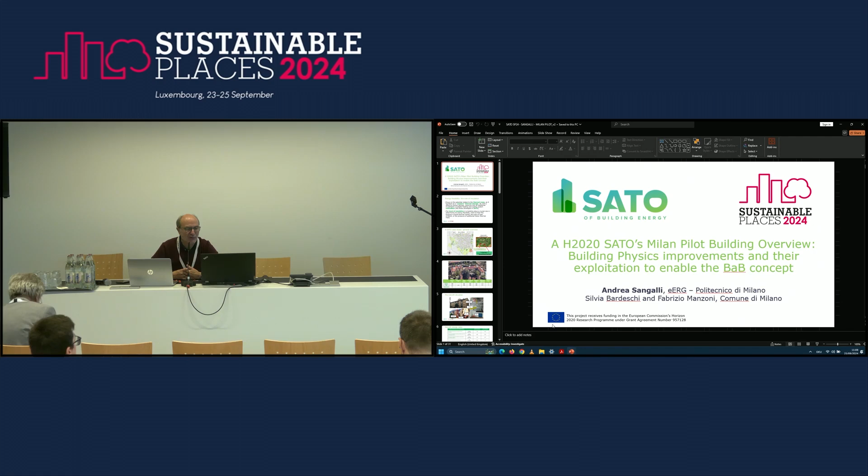Andrea, would you stand or sit? Okay, this is the clicker. I guess it works. Okay. Yes.

Thank you, Federico. I'm Andrea Sangalli, building engineer and senior laboratory technician at Politecnico di Milano. And I will present the results of a collaboration of more than 10 years with the Comune di Milano, the city of Milan, in particular with the technicians, the architects Silvia Bardeschi and Fabrizio Manzoni, by which we are making it possible to enable the concept of building as battery that has already been introduced in the speeches before.

So the main point that we would like to highlight in this session is that building as battery is a concept that can be enabled and exploited with sensors, with algorithms, like we are doing in the SATO project, but there is a precondition, a necessary condition, in order to make this potential available. That is the quality of the thermal envelope of the building. Because you can have all the sensors, all the algorithms, but if you don't have the potential given by the good physics of the building, you don't have much to optimize. So that's why we wanted to focus a particular part of this session on this topic.

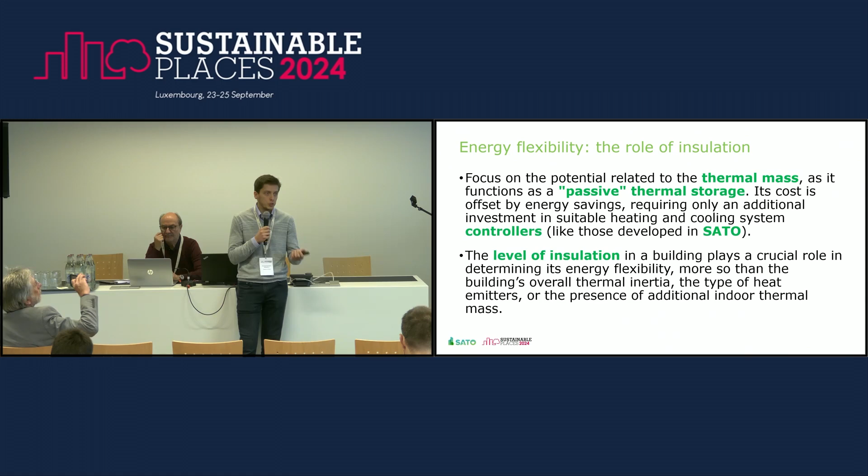So we don't require much additional investment, as is, on the other hand, required for other kinds of energy flexibility with different kinds of energy storage, like, for example, the classical electrical storage. So it's just necessary to make an additional investment in monitoring and control systems and algorithms that is for sure quite lower than an additional investment in other kinds of facilities in the building.

That's why we wanted to show a particular case study. So it's not something particularly innovative from the point of view of the scientific literature. It's something that is already well known, but with a novelty in terms of implementation, especially in the context of the public administration, like, for example, Comune di Milano. This was actually the first public residential building that was done with the NZEB, or nearly zero energy concept, for the municipality of Milan.

As a location, we are in the outskirts of the southeast of Milan. It's still Milan, but it's a kind of village, a historical neighborhood, in which several European projects have been implemented since 2013 to improve this neighborhood toward the smart city, smart neighborhood concept, and the nearly zero energy building concept.

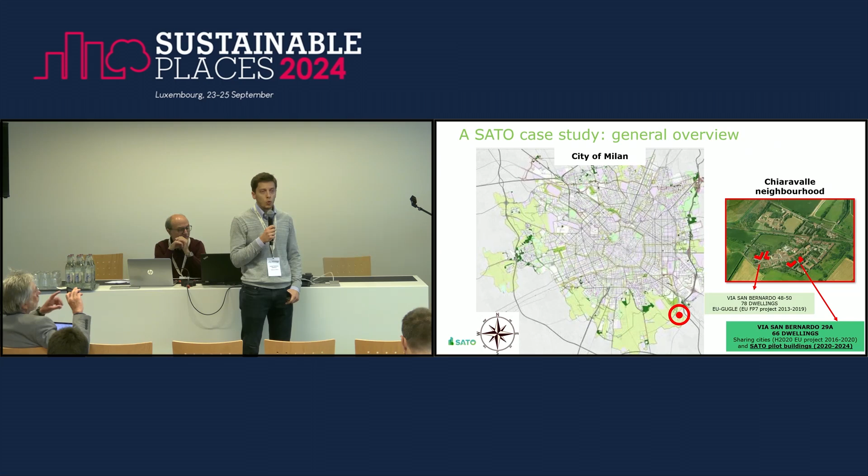We started with San Bernardo 48-50 with the EU-GUGLE FP7 project from 2013 to 2019. And then San Bernardo 29A, the one that I will address in this speech, started with the refurbishment works in the Sharing Cities project, and then we continued with the SATO project exactly to optimize the good work that had been done previously in terms of thermal envelope and building physics, adding high-quality algorithms and controls developed inside the SATO project.

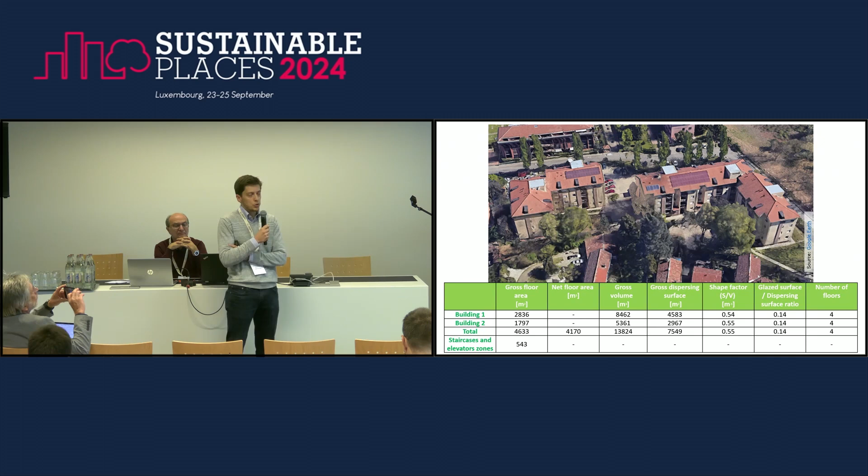Just to go quickly, this is the overview of the complex. It's 2 buildings of 4 floors and around 4,000 square meters of net floor area in total. And as I said, it's a public residential building, so with reduced rent for low-income families.

Just to have an overview of the existing, pre-retrofit situation, these are buildings from the 80s of the previous century, built with a technique particular for that area, of prefabricated concrete elements in the facade, in which there was basically no insulation. So there was a good thermal mass, but almost no insulation at all.

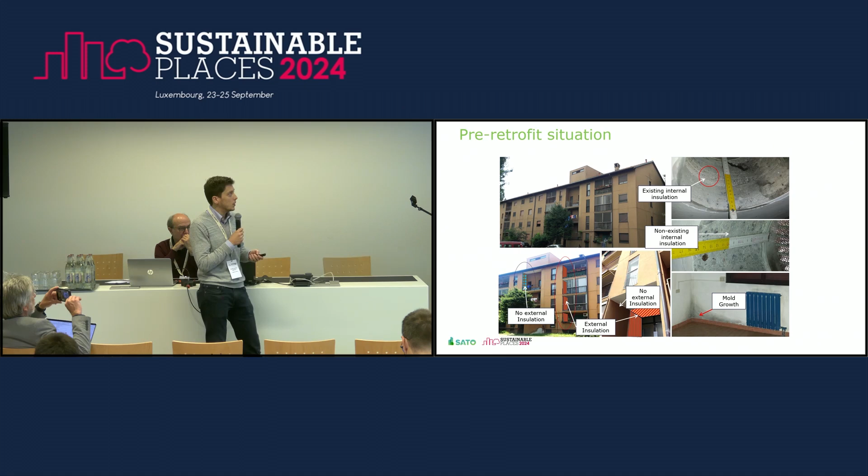Another important aspect that has been introduced is mechanical ventilation with heat recovery, that together with the quality of the envelope leads to a very good reduction in terms of energy needs. So this concept, energy need, has a specific technical meaning also in the international and European standards, and it's exactly the thermal energy that is physically necessary to provide to a conditioned space to keep a certain temperature, typically 20 degrees in winter and 26 in summer.

So this value doesn't have anything to do with the mechanical systems. It doesn't have anything to do with the efficiency of the mechanical system. No, it's exactly the energy that must be provided by the mechanical systems. Then the energy that we have to give to the mechanical system would be a bit higher, depending on the efficiency of the mechanical system, heating and cooling systems.

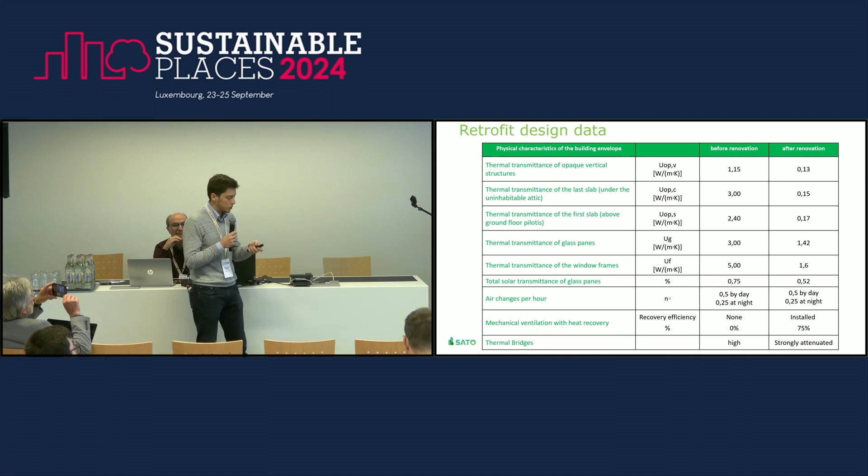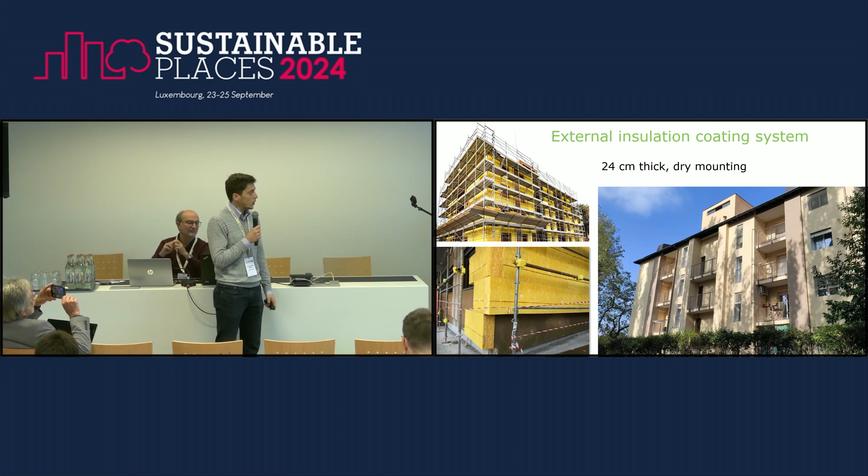To go further in detail about the thermal envelope, as already mentioned by Professor Pagliano, we added these 24 centimeters, 24, 25, depending on the facades, of external coating insulation to really make it possible to exploit at a later stage this very good thermal mass that remains on the warm side of the envelope.

As you can see, there have been different kinds of thermal insulation materials depending on the different surfaces. Basically, depending on the thickness that was available. Typically, on the balcony, there is the problem of limited space, so we have to introduce materials with a lower thermal conductivity to get the same performance with less thickness of the material.

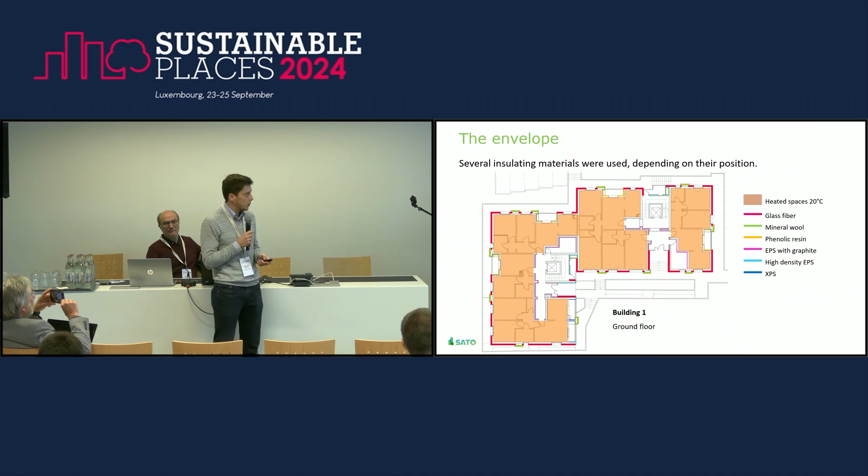So again, in collaboration between the architects that were the leaders of the project and us as a support for the scientific and thermal analysis, we had also this study of different materials that could be installed in the different parts of the walls, using also aerogel and phenolic resin, depending on the situation.

And the project has been completed with mosquito nets, because it's an area where this is a relevant issue, to allow for natural ventilation. So another further decrease of energy need for cooling during the summer season, as it is provided by the most advanced thermal standards in the topic of comfort, like ASHRAE 55 2020, ASHRAE 55 2023.

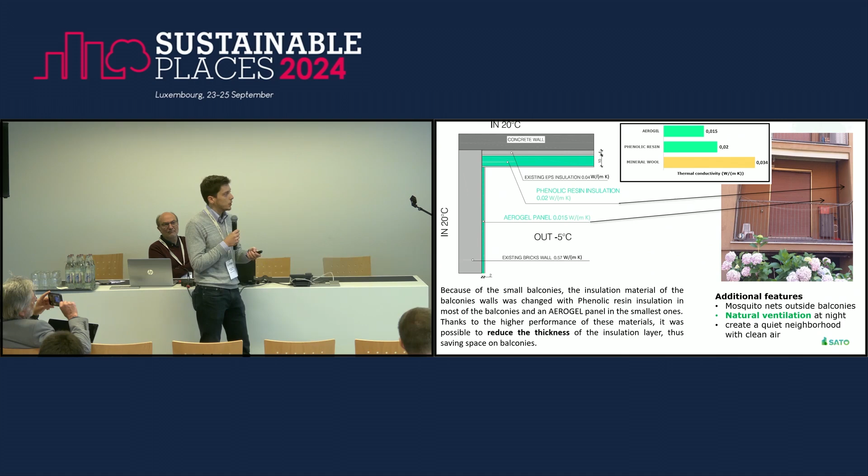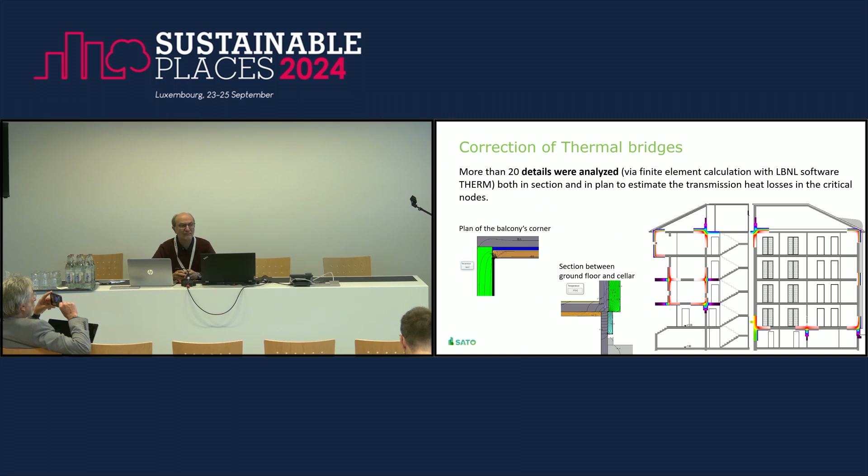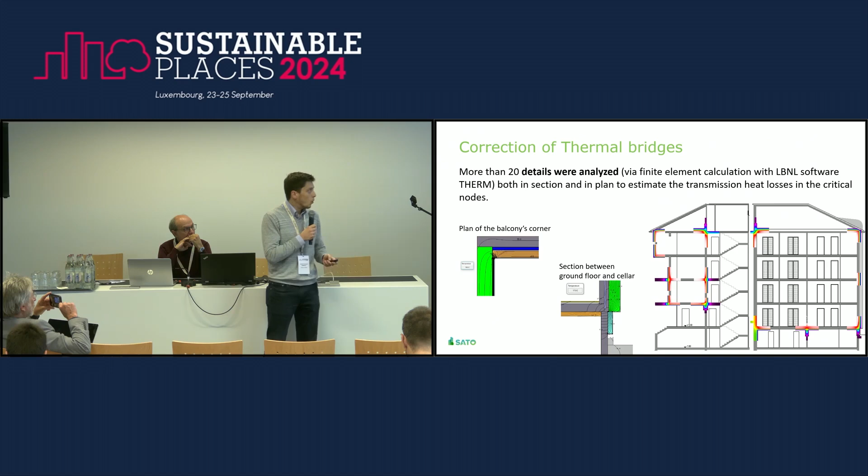Regarding thermal bridges, particular work has been done to identify all of them with a finite element analysis in order to reduce as much as possible each of the thermal bridges. For example, here this ground floor that is not heated is on columns. An additional part of insulation has been added to reduce the thermal bridge from the ground level to the first level of the building. Just to make an example, then all the details have been studied and solved as much as possible, one by one.

So this was regarding the opaque envelope. Continuing on the other side, that is the transparent envelope. There were these very low quality existing windows with a U value of around 4 that we brought to 1.25, and especially with the particular work about air tightness.

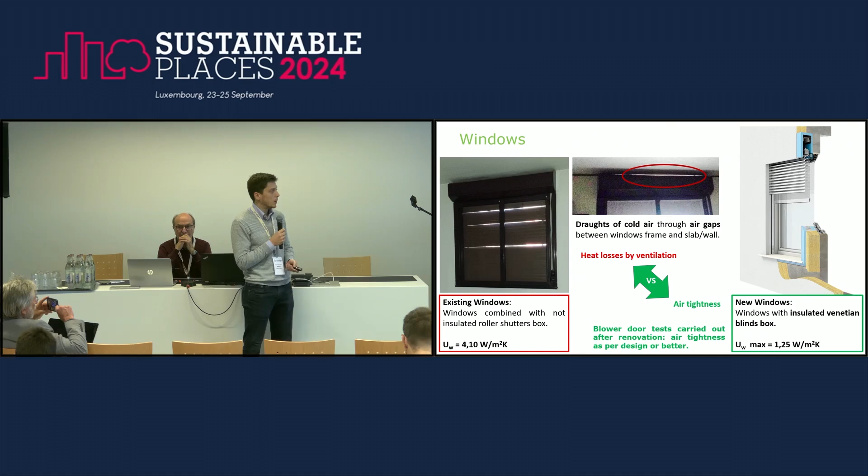That is very important to reduce not only the heat losses by transmission, but also the heat losses by ventilation. And this has been proved at a later stage, as was foreseen by the project, with the blower door test to guarantee that the expected air tightness of the envelope was reached, and it was demonstrated that this was the case.

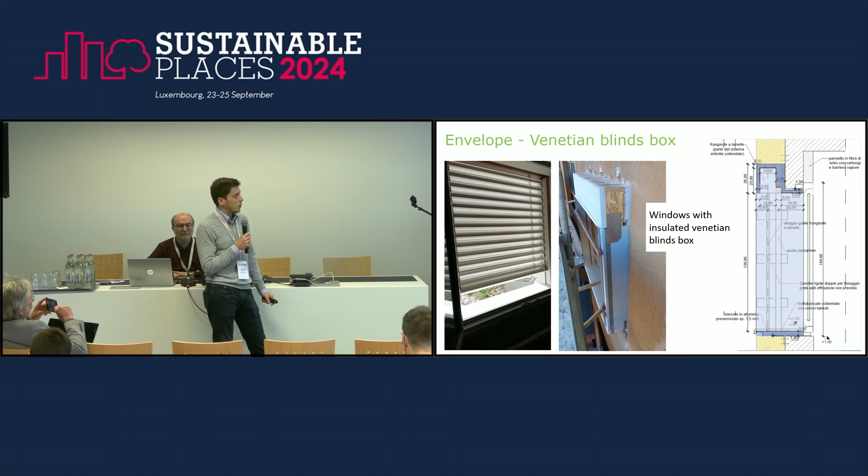Again, to reduce as much as possible the thermal bridges, and also for improving the ease of installation, this box with windows with insulated Venetian blinds was studied. So it was just a complete box, including also the solar protections, to reduce the thermal bridges between the wall and the window part.

And finally, in terms of mechanical ventilation, there was this mechanical ventilation with heat recovery and also bypass for the summer season that was included on the existing, because before there was not any mechanical ventilation, there was just the extraction ventilation from the bathrooms, from the toilets and from the kitchens. There was introduced the inlet mechanical ventilation on the facade.

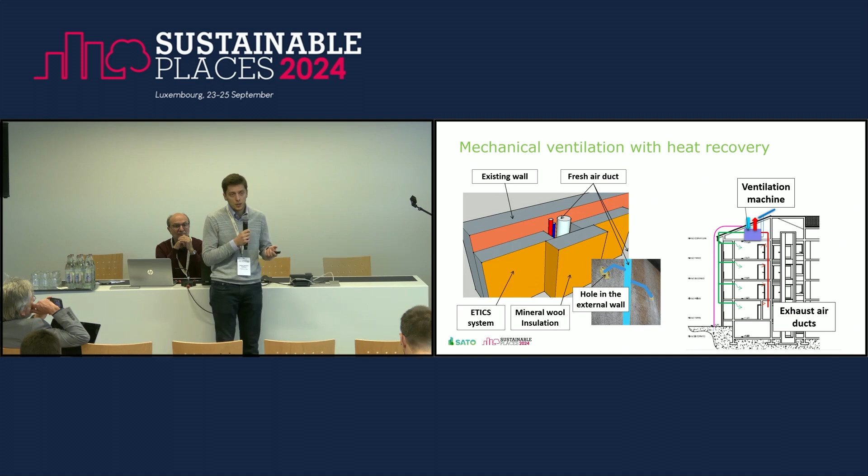There was also a topic about historical preservation and conservation on that historical area. So this was approved by the local entities in order to have this duct on the external facade, providing fresh and clean air at a very low velocity to not create problems to the users, but with this heat recovery of about 90%, even more of heat recovery.

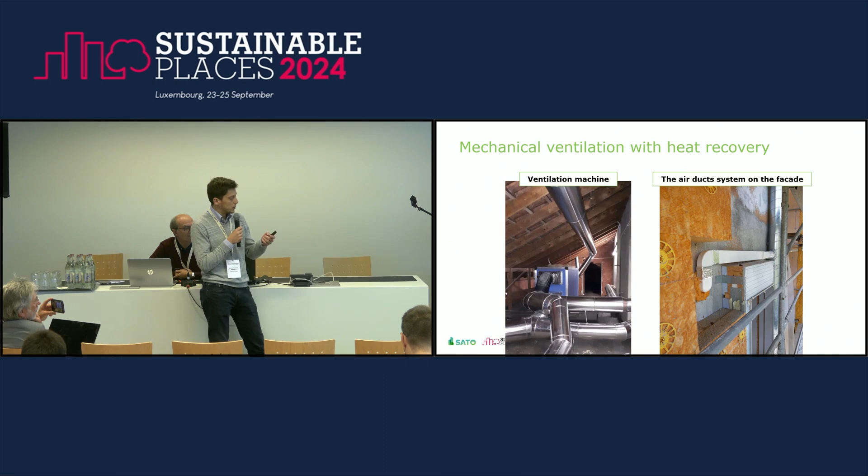This is another picture of this system in the attic, not heated attic of the building. And there on the right, you can see a picture of the system during the installation. Now, going to the other part, just to give you a complete idea, even though it's not anymore related to the envelope, for the mechanical system, it was installed a heat pump, complementing the existing condensing gas boiler, providing energy for the heating and for domestic hot water.

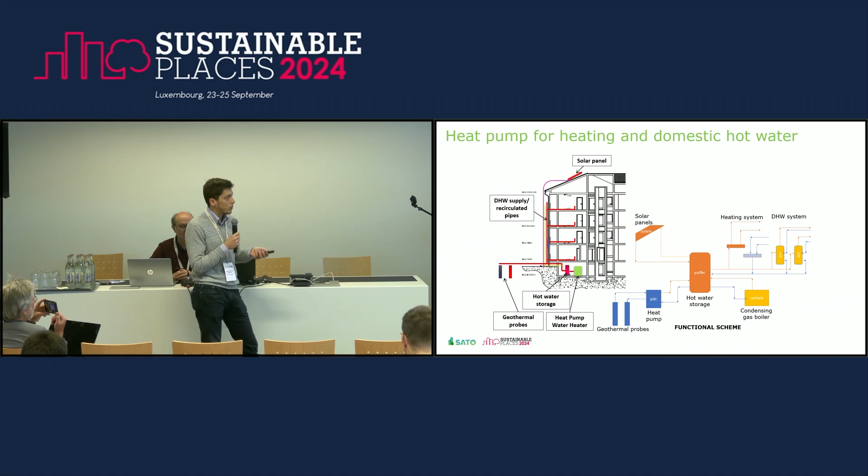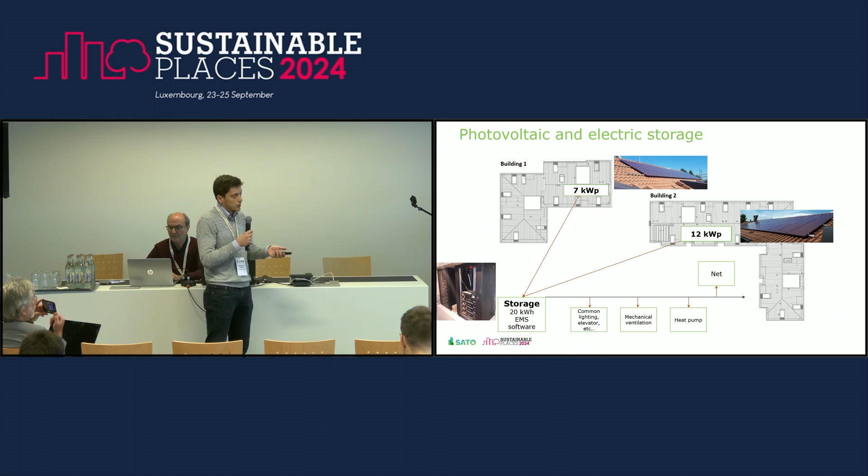And in terms of energy, renewable energy production, there was installed solar panels and photovoltaic panels. Here you can see the photovoltaic panels with a total of 19 kilowatt peak. And also inside the previous Sharing Cities project, one of the goals was to install also an electric storage for demonstration purposes. So it was these 20 kilowatt hours controlled by the energy management system, feeding the centralized mechanical systems and the common parts of the building.

This is a final general overview and summary of the intervention that I've been explaining. And in particular now, we want to focus on the last part that is strictly related to the SATO project. That is the implementation of energy and comfort monitoring, because actually the project at the end, the works obtained very good performances that has been also demonstrated by our monitoring.

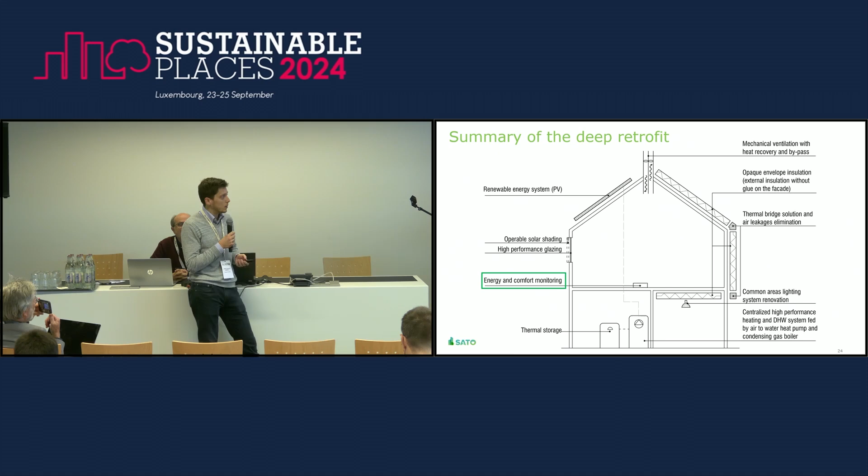But actually it was not so easy also due to the construction phase, due to the selection issues of good quality companies in the frameworks of public procurement. In Italy, at least, it is like this. It's very difficult to have the warranty that the company that has been selected in the public procurement process will be of good quality. So at first it was not the case, so the process has not been so straightforward as it should have been, but at the end we got there, and especially thanks to SATO project, we completed and improved the energy comfort monitoring, also introducing some controls.

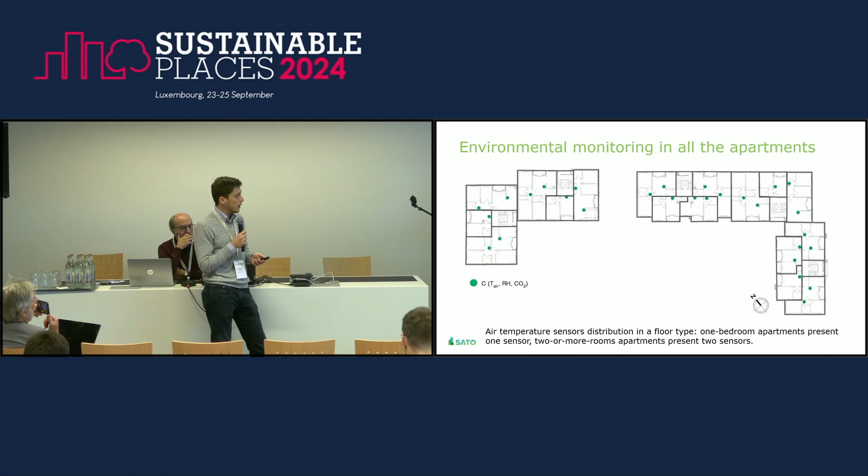This has been already shown before by Professor Pagliano, so we were doing some environmental monitoring of air temperature, relative humidity, or CO2, at least with one sensor in each apartment or two sensors in big apartments, to have always on the cloud platform from remote a real-time picture of the quality of the envelope, both from the point of view of the thermal comfort and indoor air quality, so indoor environmental quality.

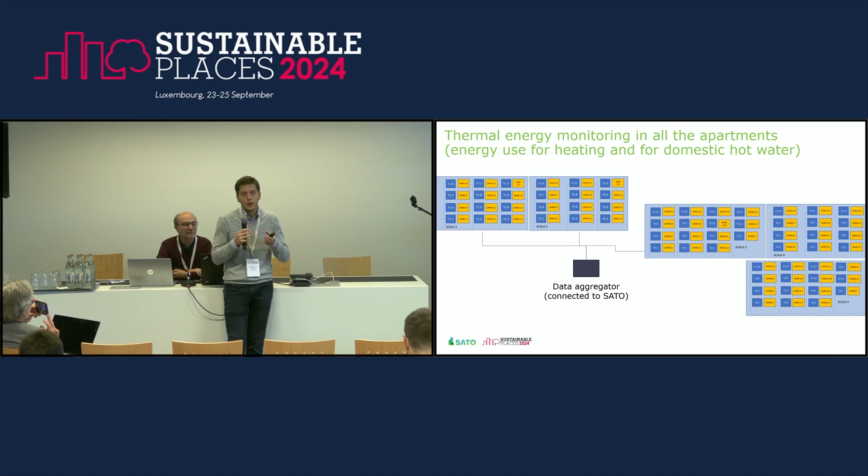There was also a thermal energy monitoring in all apartments, both for energy use for heating and for domestic hot water, with a data aggregator that has been connected to SATO. With this regard, there were, of course, different languages that have been implemented in the project, due also to the difficulties that I have mentioned. So it was necessary to make a real system integration, also from the point of view of data acquisition from SATO.

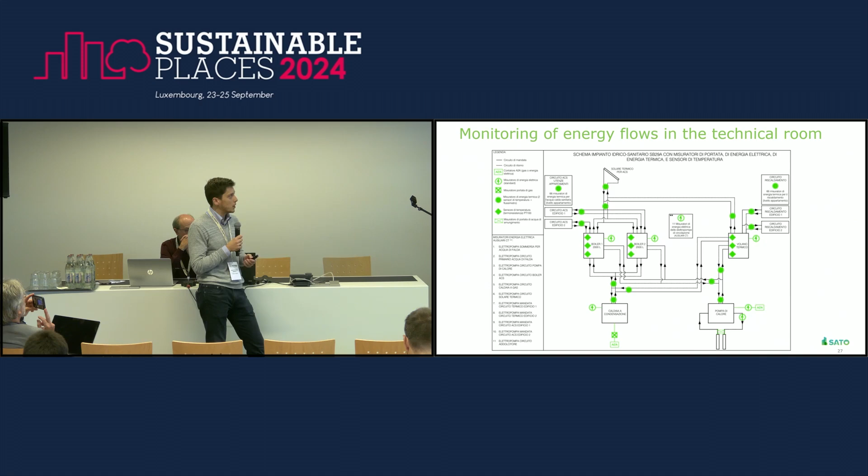Related to the technical room, the centralized heating production for heating and domestic hot water, we had this detailed monitoring of many parts of the heating center to have feedback about also the efficiency of generation and distribution of each part of the centralized system. This is just a more detailed scheme of the same concept.

And finally, in the framework of SATO and thanks to the good collaboration with the City of Milan, we had the chance to use one of these unoccupied apartments. And by the way, I forgot to mention that all of the works have been performed without the occupants leaving the building, because the interventions were mostly on the facade, apart from the domestic hot water that was decentralized and then was changed into centralized, but not much works inside the buildings.

There were, though, some apartments not occupied, and one of these has been used by us as a laboratory to test some concepts, like the building as battery that we are mentioning, a natural ventilation concept for summers, also related to the flexibility during the warm season. Here, I just want to show you a couple of sensors that we have installed, just more than a couple, actually.

We have surface temperature sensors to check what's happening on the thermal mass surrounding our environment, and also to calculate the operative temperature using the mean radiant temperature. We have globe thermometers, for a similar reason, to calculate the operative temperature, which is what is actually felt by the human body, and an important parameter in thermal comfort assessment.

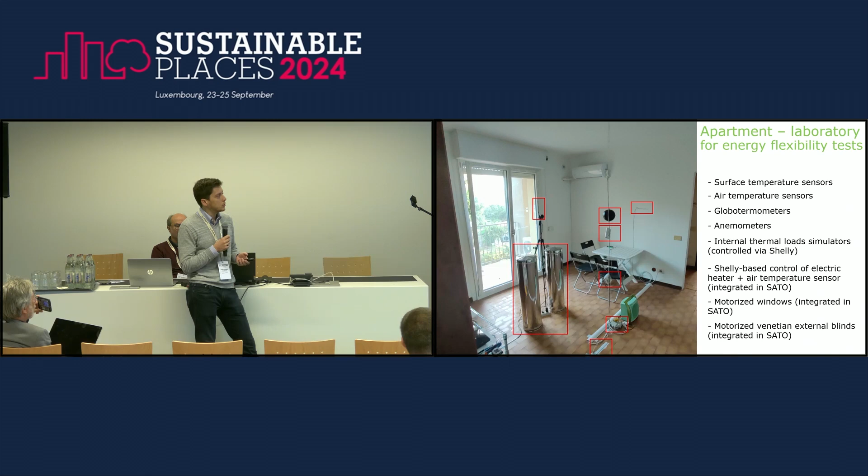We also have controls that we've integrated in SATO based on the Shelly application, to make it easy to implement and deploy on a large scale, since they are low-cost devices and quite easy to program. We've installed motorized windows and motorized Venetian blinds. Everything together creates a framework that allows us, via the SATO controls, to implement and test different strategies and monitor the effect.

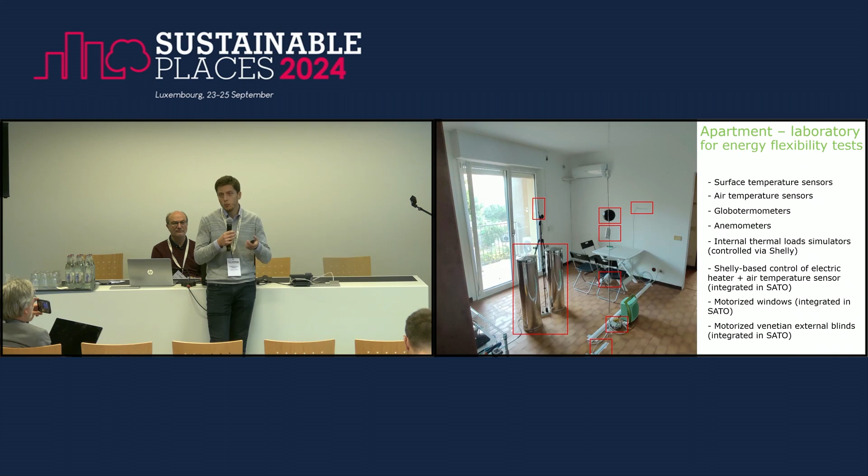As has been shown already, this is a plan of the distribution of the different systems inside the apartment. So that's it from my side.

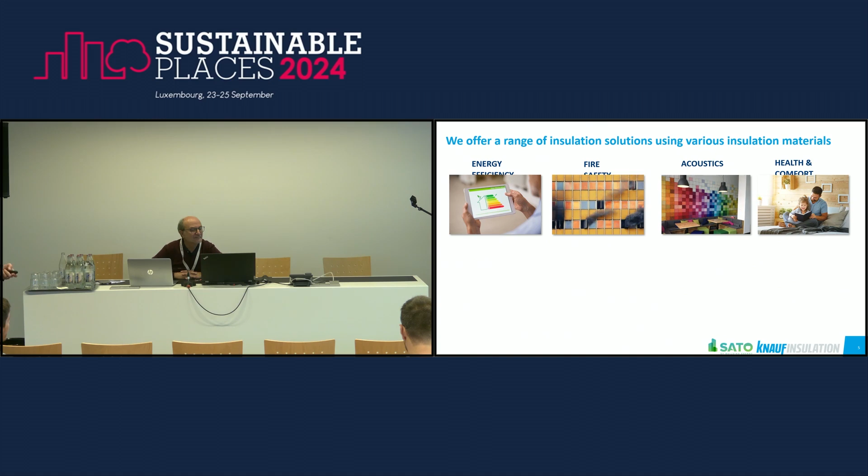Anyway, we are still a leader in the insulation manufacturing environment. The figures aren't easy to read - I don't know what happened with the PowerPoint. Anyway, we have local European roots, but plants all over the world, in the US, Malaysia, Abu Dhabi, and so on. What we do at Knauf Insulation: we are a proud manufacturer mainly of mineral wool insulation, both rock mineral wool and glass mineral wool, with still a few plants in Europe manufacturing wood wool.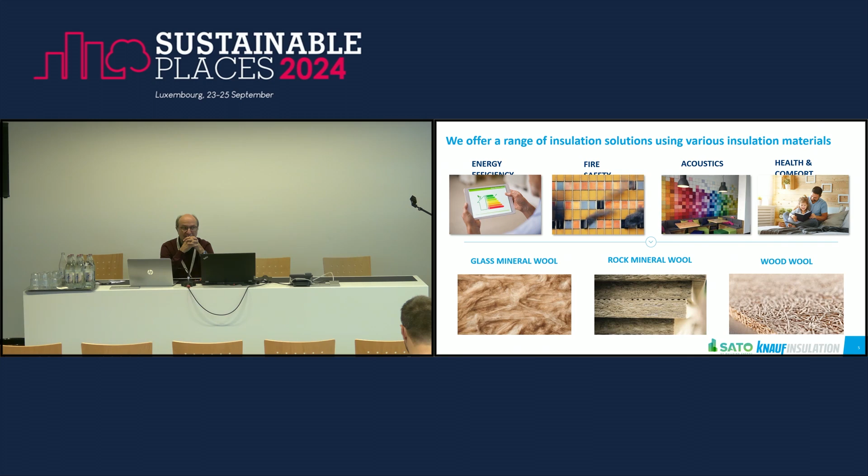Why did I say proud manufacturer of mineral wool? Because we strongly believe it's hard to find insulation that combines energy efficiency, which is quite obvious - thermal insulation should provide energy efficiency - but at the same time, mineral wool insulation is able to provide fire safety to building occupants, acoustics, and more generally health and comfort, which I guess has been the reason behind the choice of insulation in the buildings shown by Andrea.

By the way, mineral wool insulation can be used in a wide range of applications, not only construction, but also to provide green solutions, meaning green roofs, green walls, and so on. It's largely used in agricultural business as well, and for industrial products - most of our kitchen ovens are insulated with our products - plus many applications across wider industries. During the 4 years in SATO, together with Politecnico, we stressed the need to focus first on the energy efficiency first principle.

So let's make sure that the building envelope is well insulated, deeply insulated. This will allow a dramatic decrease of the energy demand for heating and cooling, and as shown by Lorenzo and Andrea, together with this benefit, we also have the potential of increasing the number of hours. We have seen even days in which occupants could stay in a comfort zone, up to 4 or 5 days.

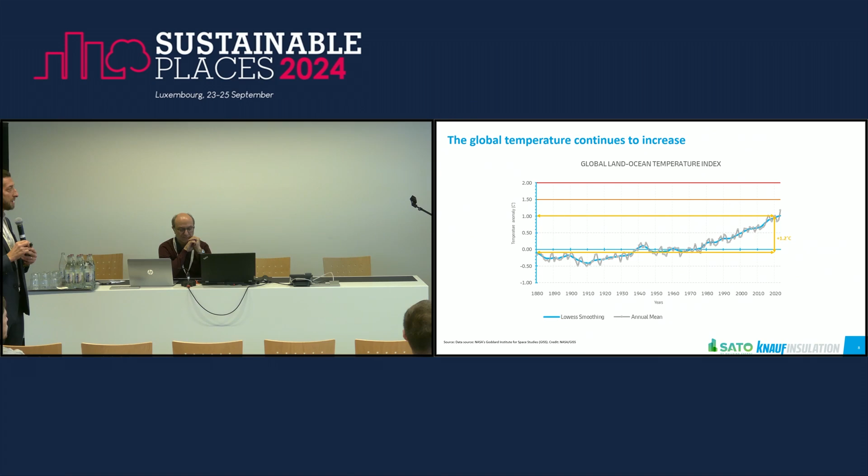The pressure on the manufacturer to reduce our carbon footprint is more evident than ever. I don't need to share with you the reasons behind - I guess all the people in the room have the evidence in mind why we need to act now. We have seen this dramatic increase in the average Earth temperature during the last century and a half.

So the pressure is there, even though the regulations around Europe are not still there yet. I mean, we see that in some markets, some countries, regulations are already there, asking for low carbon products and so on. But for sure, it is something that we cannot avoid.

I mean, regulations will come, so we need to anticipate as much as possible the risk related to the regulation. At some point, it will be a matter of license to operate for manufacturers, no chances to escape. But again, a second source of pressure for manufacturers: the market.

We see more and more from voluntary certification schemes like the ones I've mentioned - LEED, BREEAM, WELL, I could list a number of them - but anyway, an increasing demand of low carbon solutions, maybe at building level, but also at product or system level.

And at the same time, when we look at our customers, especially the biggest ones, since we are part of their scope 3 targets reduction in terms of CO2, they look at us and say, hey guys, please support me in decreasing and achieving my targets in terms of CO2 reduction.

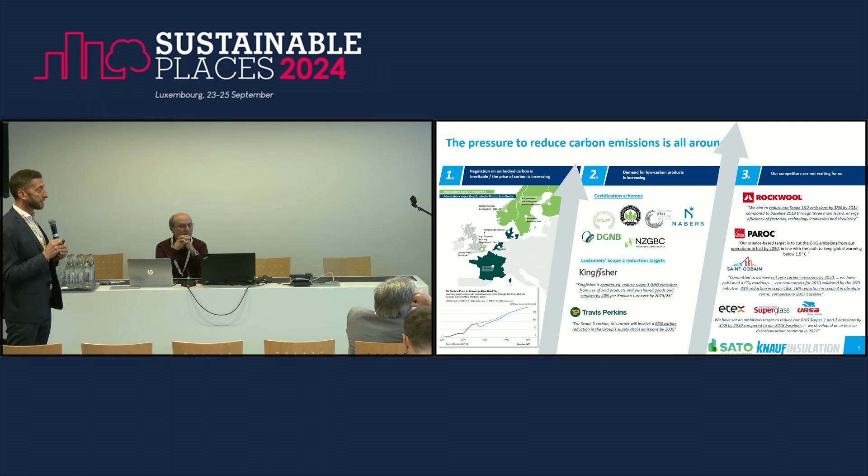So as insulation manufacturers, we are seated somehow in a good position. The good news for us is that insulation is key when it comes to decarbonization. Why? I don't need to repeat what Andrea and Lorenzo have said, but anyway, insulation, by reducing energy need for heating and cooling, automatically, dramatically decreases the operational carbon. So the CO2 emissions related to heating and cooling the building are strongly decreased thanks to a more efficient, well-insulated envelope.

Another good news for us is that the average carbon payback of our products - so the time needed to compensate the emissions related to the manufacture of our solutions - is 95 days. So let's imagine we install our products on the 1st of January; after something more than 3 months, or let's say 3 months, the payback is achieved.

We have compensated the CO2 emissions generated by our plants thanks to the decrease in operational carbon at the building level. For the remaining 270 days, as an average, we provide a relevant contribution to the decrease of carbon emissions. Is it enough?

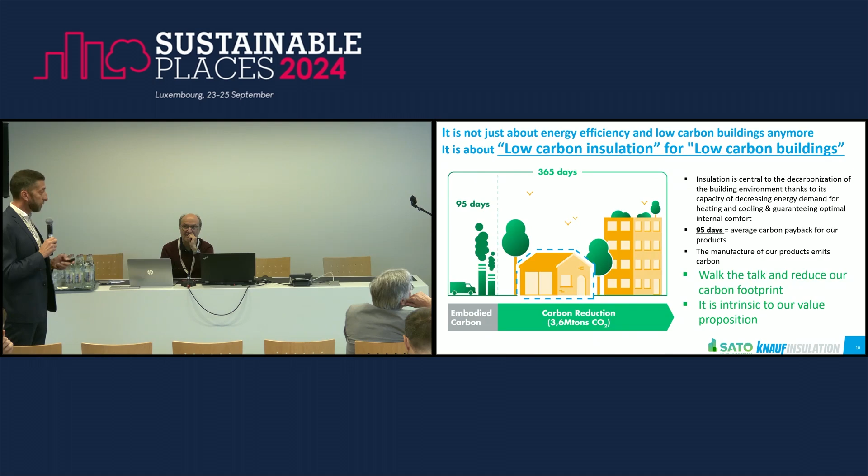We need to walk the talk and reduce our carbon footprint. As said, German group, so they love figures, providing clear data, targets, strategy, roadmaps, milestones, and so on. So this is the Knauf Group mid and long-term goals in terms of zero carbon, split by type of emissions, so Scope 1, Scope 2, and Scope 3.

By 2032, we are committed to reduce 50% of Scope 1 and Scope 2 combined emissions, and 30% less of Scope 3 related emissions, with the long-term target of being net zero by 2045 on all three scopes, which is clearly fully aligned with our own strategy as Knauf Insulation, which clearly follows the same milestones.

By the way, 2032 is not by chance. It is the 100 years from the foundation of the group. It's not by chance that we decided to take 2032.

How's the situation? Looking at our own garden in Knauf Insulation, this is the split of our emissions, Scope 1, Scope 2, and Scope 3. I don't have the time to go deep into the details.

Anyway, Scope 1, direct emissions, so the ones related to the facilities in our plants or the lines that are burning. We know that we are an energy-intensive sector, industry, so most of our emissions come from Scope 1.

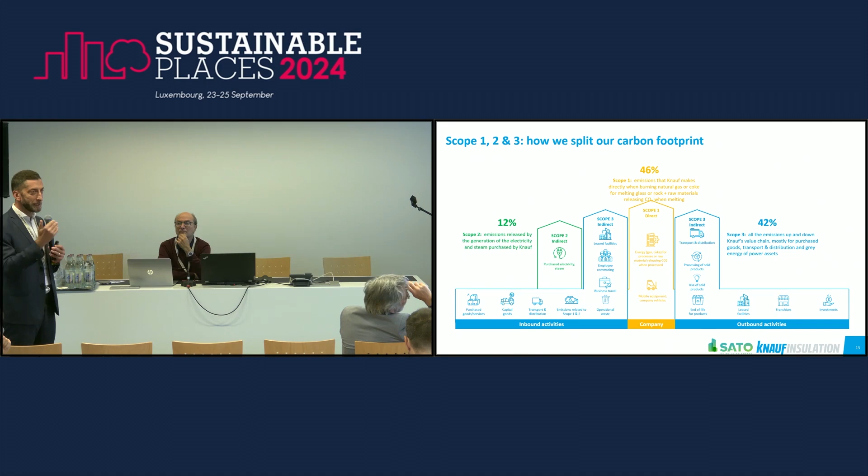Then another relevant share of our emissions is related to Scope 3, so indirect emissions, inbound and outbound, 42%, and then still relevant, more than 12% from Scope 2, which is again indirect emissions, mainly related to purchased electricity or steam. So clear focus on addressing Scope 1 and Scope 3, which are, by the way, the most hard to address. So we will need to take some time, but for sure the focus is there.

The challenge, what about the challenge? The challenge, as I said, is to halve our emissions by 2032, which is already quite interesting, and go as close as possible to zero by 2045, in absolute values.

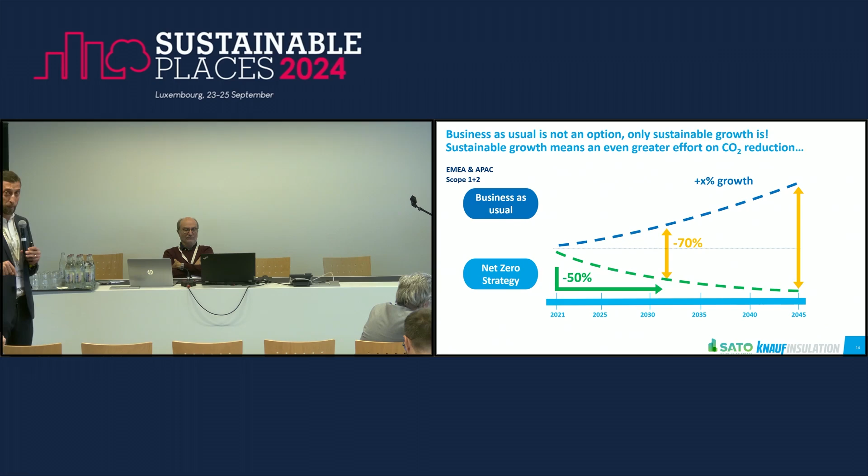If we combine those absolute values with the ambition of the group of growing, so increasing the capacity, it makes sense. I mean, if we have to achieve the European targets of being carbon neutral in the civil sector, so buildings, by 2050, we will need insulation.

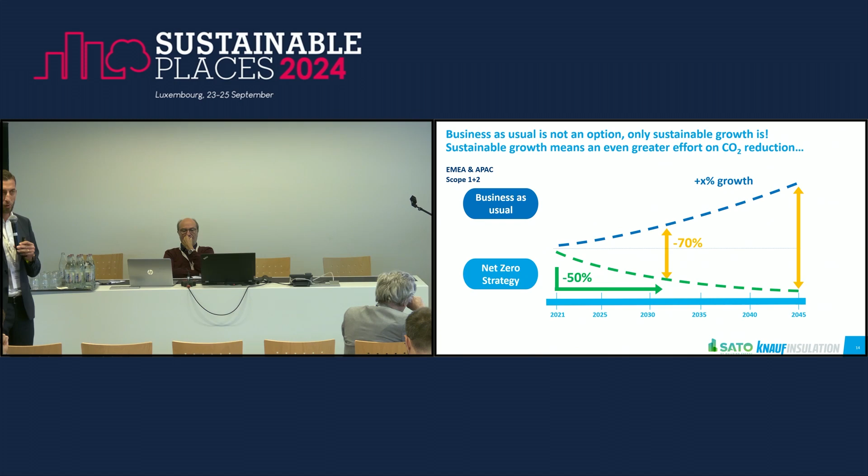We will need all the technologies, so photovoltaics, heat pumps, anything that could provide the benefit at building level. But anyway, insulation, we know, will be key. So if we combine reduction targets and ambition of growth, the challenge is even more relevant.

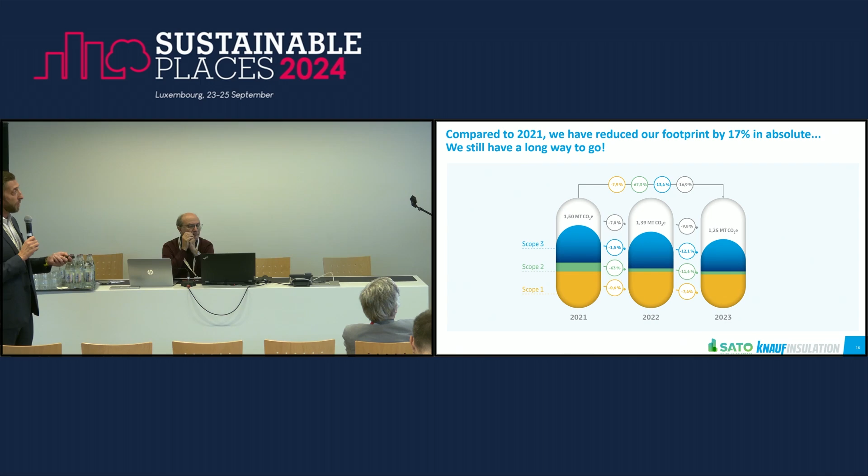So again, baseline 2021, this is the split of Knauf Insulation EMEA emissions, and then you can see the development towards 2023. Let's say the gray one, is it working? Yes. Gray, I can't see it, but anyway, gray one is... no, I wanted to use the indicator, but no problem.

Gray one, minus almost 17% global CO2 reductions, and then the split blue, green, orange, or yellow, the three scopes. So what to say? Minus 17% in general, guys, good job. And you can see that mainly coming from Scope 2. As usual, we go for the low-hanging fruits, so the easiest, the fastest, let's go on that, and then in the meantime, let's work on the hardest ones.

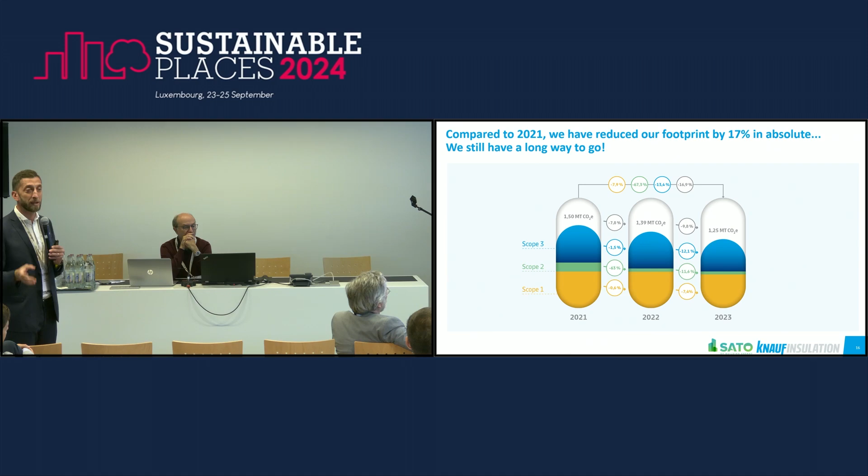The slide says we still have a long way to go. Why? Because it's clear that we have not done enough on Scope 3 and Scope 1, which is, as I said, the hardest one, the focus of the next 10, 15, 20 years for the group.

As said, Scope 2, we have as a main contributor so far electricity from renewable sources. Since 2022, in many plants across Europe and also in Malaysia, we have procured energy attribute certificates in order to purchase green electricity for those plants.

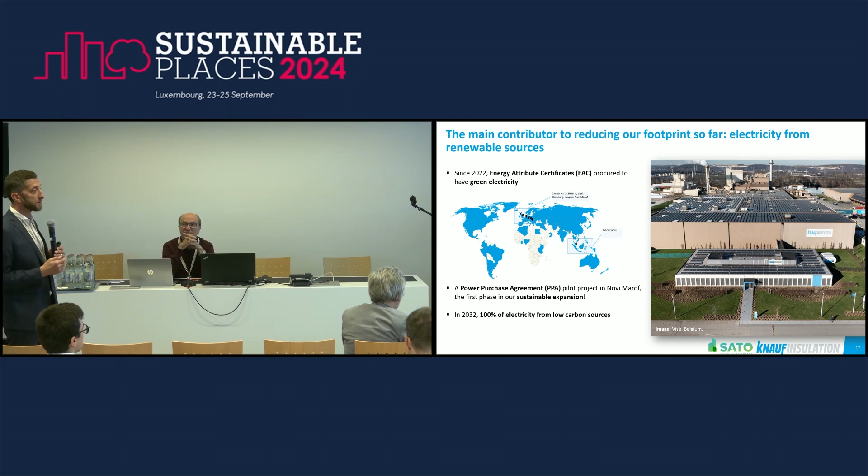We are launching a pilot project in Croatia, in our rock mineral plant in Novi Marof, a power purchase agreement, so long-term, at least 10 years, to get electricity from renewable sources, which will allow us to have our very first full electrical line of manufacturing rock mineral wool products, with the target of being in 2032 fully supplied by low carbon sources when it comes to electricity.

Scope 1, which is, as we said, the hardest one: what we are looking at in terms of potential solutions to decrease the carbon footprint of our lines. I just brought here 3 examples on which we are working. First one, biomethane. Second one, hydrogen. And third one, potentially as a combination, carbon capture, use, or storage technologies. Just 3 examples.

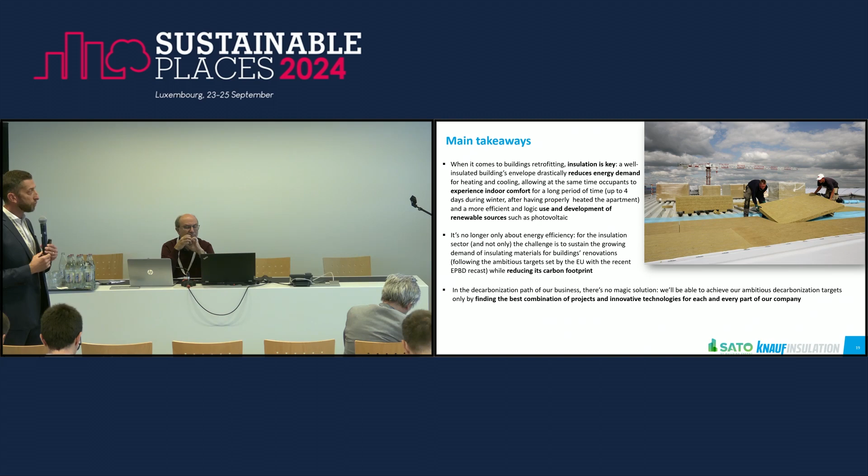As I am saying in my last slide, it's clear that there's no magic solution when it comes to decarbonizing our lines. Most probably, it will be the optimized combination of different technologies, different solutions, different projects for each and every part of our company, also depending on the location of the plant, the energy mix. So there are a lot of factors that have to enter into the algorithm, and then we will provide the targets on which we have committed. That's it from my side.

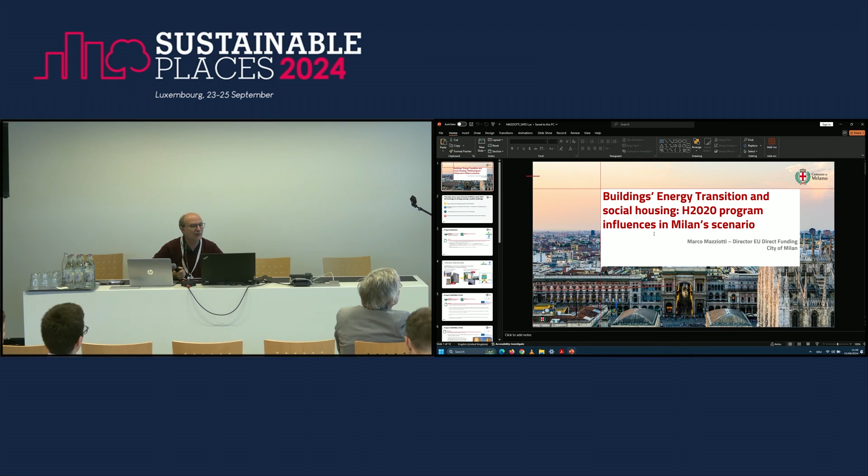Good morning, everyone. My name is Marco Mazziotti. I'm in charge of the EU projects department at the City of Milano. We coordinate the participation of the municipality in EU funding, together with the technical departments. So we look for funding, look for calls, and then we develop with our colleagues and with our partners, both international, local, and Italian partners.

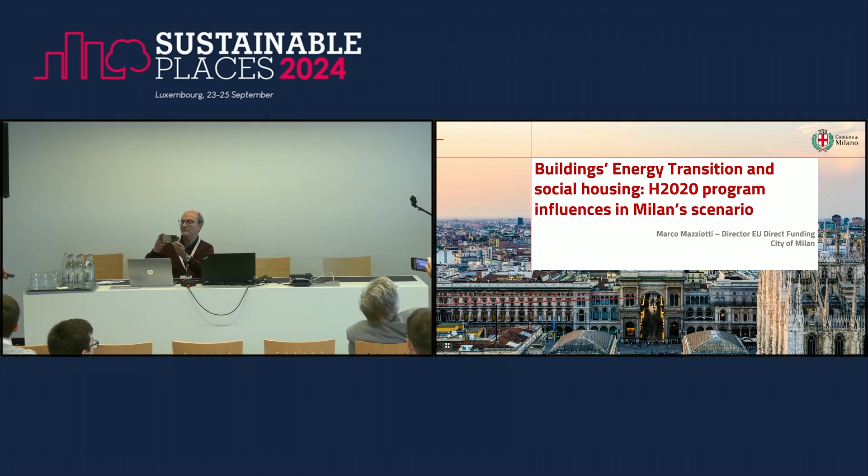We have talked long about the SATO project, which is a project of City of Milano in partnership with the Politecnico of Milano. SATO is just one of the projects we are developing with the Politecnico, and just one of them focusing on housing. I'm going now to take a step back and showcase a few projects the municipality is developing and developed in the past years on this topic.

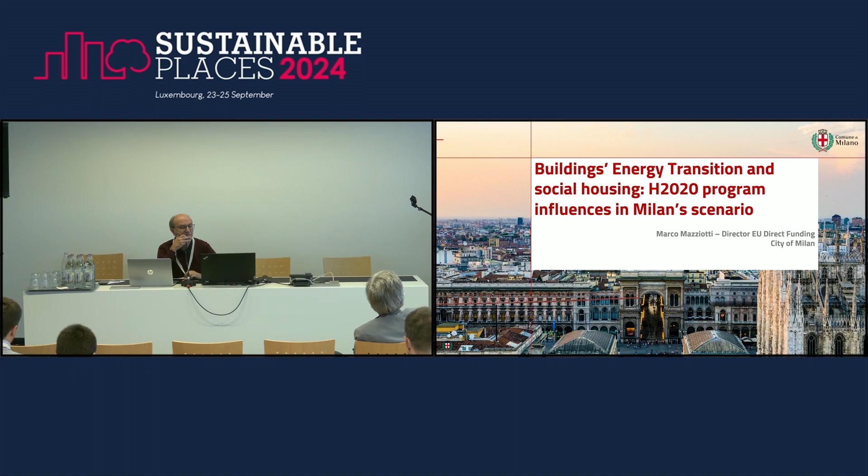So the backstory, how Comune di Milano went after EU funding on energy saving in public buildings. It's actually, now we can say, a long story. It's a high priority for the municipality, public buildings but also private buildings, of course. It is tied to the topic of climate change. The City of Milano is part of the European initiative 100 Climate-Neutral and Smart Cities by 2030, and in a couple of days we are going to have a huge presentation of this initiative in Milano.

We defined years ago a municipal strategy for a smart city district in the southeast part of the city, called Porta Romana Vettabbia area, and we decided to focus all our projects on this topic on that district. Today, we are in the second phase, so we are working in the entire city, but that was our first experiment. We established a partnership at the local level with Politecnico since autumn 2011. So it's almost 13 years and it's still ongoing. It's a profitable partnership.

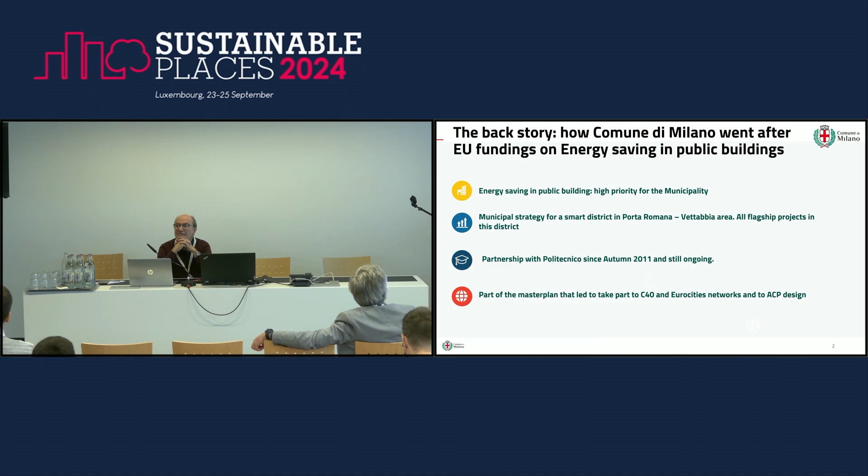Our technicians need to be trained by academia, and Politecnico is giving us what is missing at municipality level. This strategy on public buildings is part of the master plan that led to take part in the C40 network, an international network of big cities committed to the fight against climate change, and Eurocities, which is a European network. All this gave us the opportunity also to design the Air and Climate Plan, which is now active in the City of Milano.

Very first project, probably mentioned by Andrea before, a EU-GUGLE project. Period 2013, it lasted 6 years. You all know how EU projects work. If the project started in 2013, it was thought of probably 2 years before. So we can say that 13 years ago, the municipality of Milano, together with Politecnico, were really thinking about working on this topic. In that period, I was not even working for the municipality. Milano was on the front line on this topic, at least compared to other Italian cities.

Project EU-GUGLE: showcases of cost-efficient urban zero-carbon building renovation models in 6 partner cities and 3 associated cities. The leader was Zavala. The pilot partners were Milano, Gothenburg, Aachen, Bratislava, Sestao, Tampere, and the city of Vienna. These were the main partners. The total partners of the project were 23, with a total budget of 26 million euro.

Probably at the end was 30 million euro. Among them, more than half was EU contribution. In EU-GUGLE, we developed an interdisciplinary approach, innovative and cost-efficient mix of actions, a set of sustainability-oriented solutions. We renovated in Europe more than 180,000 square meters of living space, and this was a role model for other cities interested in resilient urban planning.

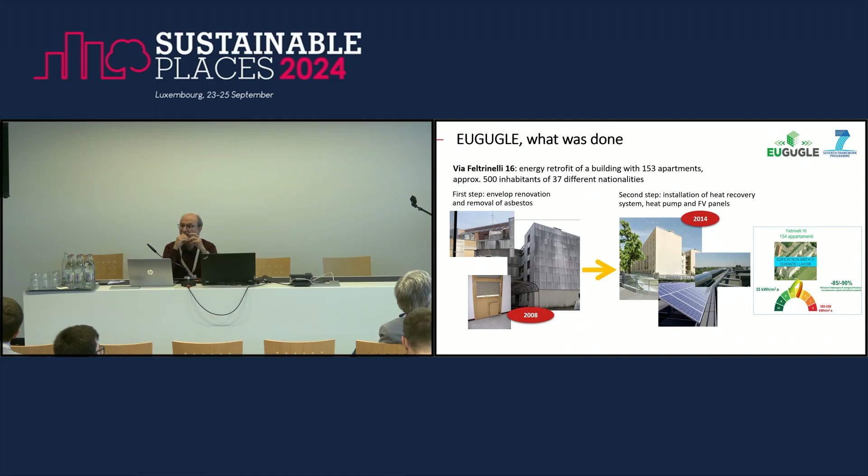Just would like to point out that, as said, 500 inhabitants of 37 different nationalities. Because in these projects, we work on public housing. And we also know there is an issue connected to the topic of energy poverty. While we are working on the technical aspect, so energy retrofit, on the other side, we try to involve citizens and we try to develop other projects, social projects on energy poverty. So we are trying to work from both sides, technical and social.

Second project, Sharing Cities. So let's go to the second programming period, Horizon 2020. This was a huge project, a flagship European project. The leader was GLA, the Greater London Authority, from 2015, 6 years, to 2021. It had maybe 20 partners. The main partners were Milan, Lisbon, and Eurocities. If we compare, EU-GUGLE was more facing the technical issues on energy, on public housing and retrofit.

Sharing Cities addresses some of the most pressing urban challenges, such as energy use, low carbon transport and buildings, and harnessing data for the good of the city. So the main focus of Sharing Cities was public buildings, energy, mobility, and data. So it proved the potential for environmentally focused technology to positively impact cities. We tested 10 different technologies to reduce carbon emissions, improve energy efficiency, and encourage citizens to make sustainable choices, which resulted in a reduction of CO2 and greenhouse gas emissions.

So under the topic of mobility, we involved the citizens and supported them to make sustainable choices in their daily routine. In addition to drawing on 24 million euro in seed funding from the European Commission, we generated 265 million euro in further investment in the smart city marketplace. This was probably the most difficult target of the entire project, which was successfully reached.

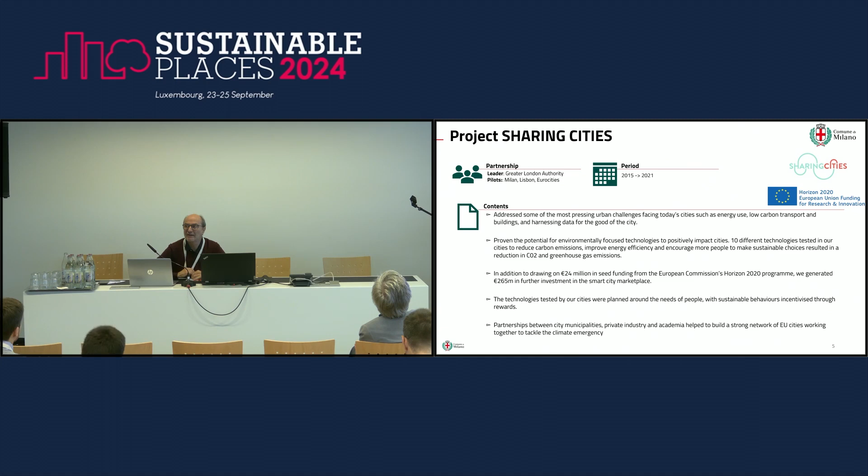We established partnerships between city municipalities, private industry, and academia, and this helped to build a strong network of cities working together to tackle the climate emergency. This was actually a really tough project to develop because the topics were really tough, and at that time it was a really innovative project, but it was in the end quite successful, and it was also recognized by the European Commission.

What was done? A dashboard for sustainable energy management, requalification of public residential buildings, and a series of private residential buildings. So we worked on public buildings, renovating 5,000 square meters, and we supported the private residential buildings, giving them a kind of financial support for 21,000 square meters. We had also intelligent light poles in the demonstration area, capable of guaranteeing control of the lighting flow, depending on the presence of vehicles and pedestrians, in order to reduce energy consumption.

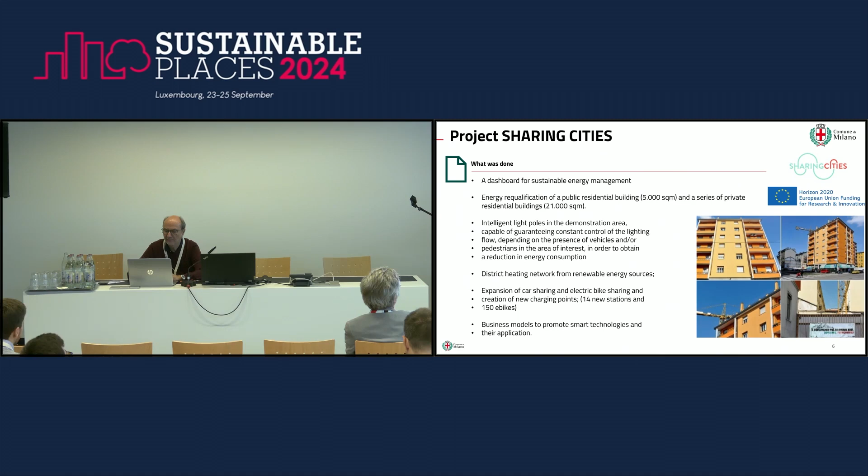We had a district heating network from renewable energy sources, and we expanded our car sharing and electric bike sharing by creating new charging points and 14 new bike sharings and 150 e-bikes. These bikes are still today used by citizens. Last but not least, the business models to promote smart technologies and their application were also developed. On the right, you can see one picture of one of the buildings targeted by the project.

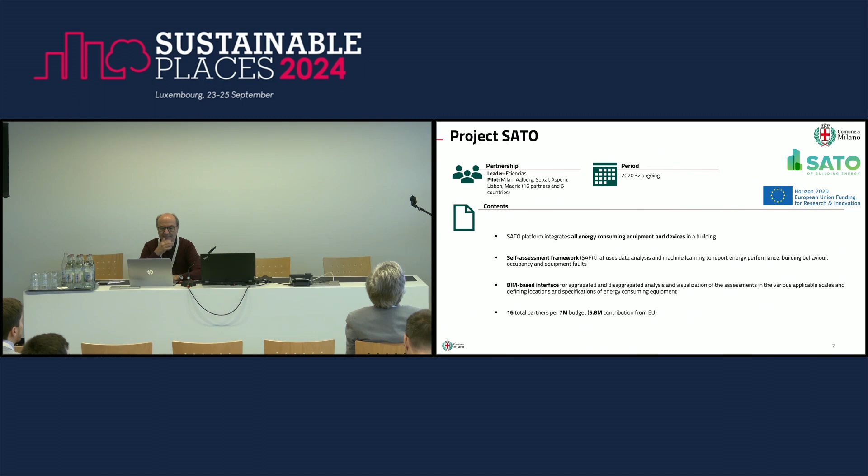We have the SATO project, of course. Colleagues before said enough about this project. You know everything. The platform of SATO integrates all energy-consuming equipment and devices. The project started in 2020 and is ongoing, even though it's actually at the end, the last month of activities. We are 16 total partners. The budget is 7 million. Of that, almost 6 million is a contribution from the European Union. I'm not going to say more about SATO because colleagues said enough.

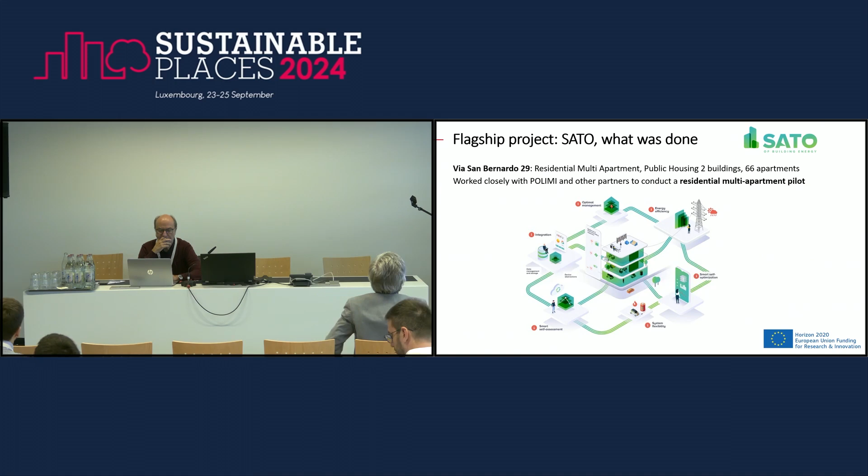Via San Bernardo 29, which is still the district that we mentioned at the beginning, in the southeast area of the city of Milano. We have this residential multi-apartment public housing, 2 buildings, 66 apartments, and we are working closely with the Politecnico of Milano and other partners to develop and conduct this residential multi-apartment pilot.

Another ongoing project in which we are working with the Politecnico of Milano is the Reskin project. This just started last year. The Politecnico of Milano is the leader of the project. 21 partners, 10 countries, 4 demo sites. Milano is one of them. The project aims to develop a package capable of transforming an existing energy-intensive building into a modern, efficient, and above all sustainable structure, integrating ICT, renewable energy, sustainable materials, and new generation installations.

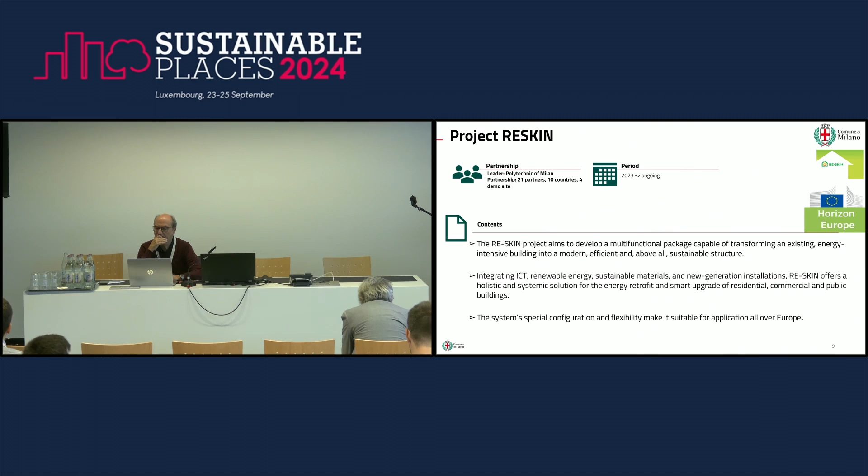The Reskin project offers a holistic and systemic solution for the energy retrofit and upgrade of residential, commercial, and public buildings. The system's special configuration and flexibility make it suitable for application all over Europe. In our case, we are just starting our pilot. We identified the public building, which is now used by local associations committed to social issues. In these days, we aim at starting works. All the administrative procedures, all the studies, the project have been done. So we think we can start the demo site next week.

What we are doing in the Reskin project: no scaffolding installation. Use of scaffolding is replaced by that of a moving platform. Most of the wiring and on-site devices are avoided. Specific components allow partial reuse of the existing windows. And works can be done from inside. This is a very specific action of Reskin. The works are really light. We are going to regenerate, to make this building more efficient with very light works. And according to studies, it will reduce energy consumption by 80%.

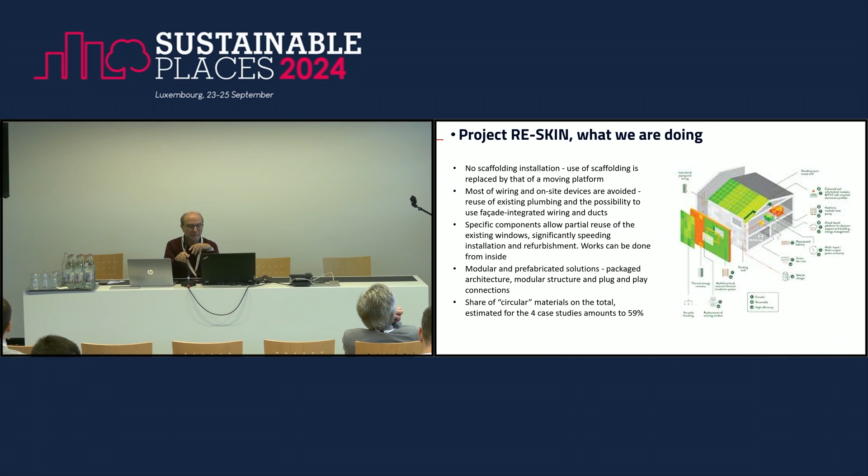The share of circular materials on the total, estimated for 4 case studies, amounts to 59%. We will receive the materials from another part of the project, so we are talking about really innovative projects. I said before, we started with EU-GUGLE, and I guess now all technical aspects change a lot. We've been working on this for almost 15 years. We are glad of the experience we had. And we recognize European projects, in this case FP7, Horizon 2020, Horizon Europe, are a great opportunity for local authorities to get significant and tangible improvements on energy-saving public buildings.

We have a lot of lessons learned. The development of partnerships is really important because it makes it easier for public bodies to team up with excellent scientific partners, in our case Politecnico of Milano, but not only, and to exchange good practice with other public bodies around Europe. We learn a lot from other European cities. Our colleagues are traveling thanks to the opportunity given by the project to other cities, seeing what other public administrations are doing.

This is supporting us in the internal management. The projects provide ideas on how to better organize the work within the public body, and I assure you this is really tough, because a big public body like the Municipality of Milano with almost 15,000 employees has a really complicated administration and really complicated bureaucracy issues, and this is really of support. Social aspect, last but not least: these technical projects help us improve the conditions for citizens living in public residential buildings, because the main target of these projects is people living in public housing. So they are the direct beneficiaries.

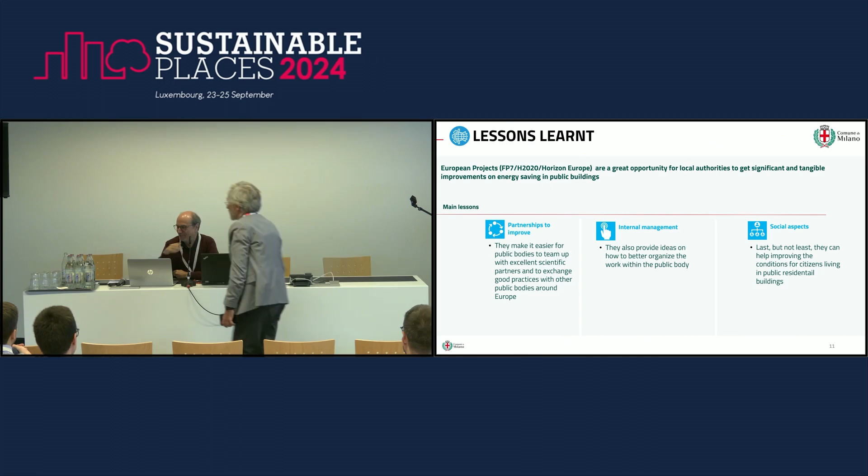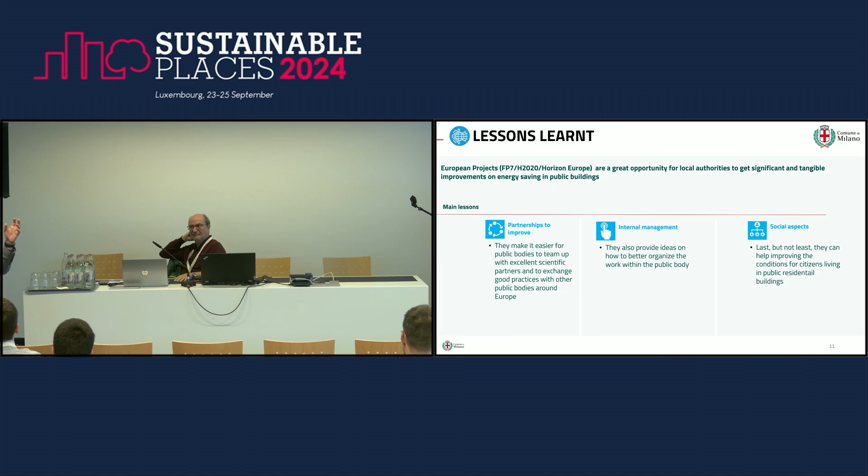Just an additional comment on the cooperation and on the fact that, at least in Italy, there is maybe not a good opinion on the working of the public authorities and the possibility for them to develop high quality work. I think that these cooperations that have been illustrated show how our public body can be an actor, and the cooperation with industry and with researchers is one of the things that we also appreciated,

the fact that the availability of a public body to work on things that were challenging for them is really a great value in this difficult task we have. So that's just my comment on the fact that yes, we can do beautiful work in public areas with cooperation with industry. There is a lot to do for everyone, and in spite of some negative expectations that sometimes are running around in Italy, everyone is doing a beautiful job.

Please. Let's keep it on. Yeah, thank you.

Just regarding the community of Milano, how has been your experience in sharing these results and lessons learned with a community of other cities, and how has been this exchange of experiences to scale more the results of this type of projects? Have you been having this type of experience? How has it been for you in this sense?